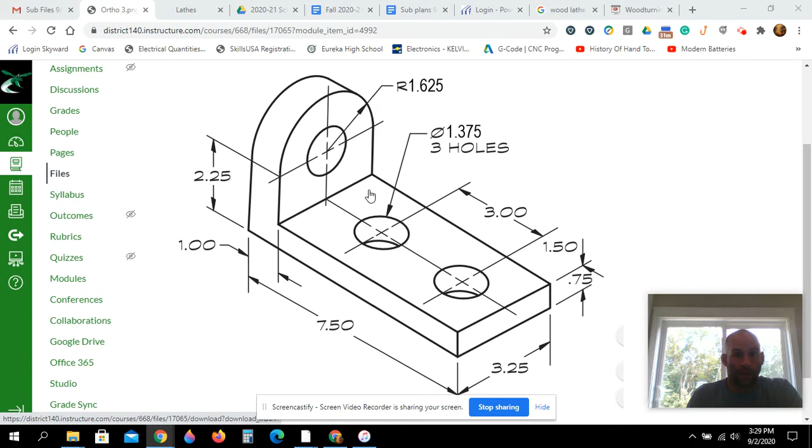So go into Canvas, right-click on your image and hit copy. Go ahead and go into your AutoCAD. Mine is older looking because, well, it's the 2011 version.

It's kind of old. Here we can see the bottom line. On our drawing it's 7.5 inches long, so we're going to draw a line nice and flat at 7.5. We can see that's much smaller than our picture, so I'm going to take my picture, click on it.

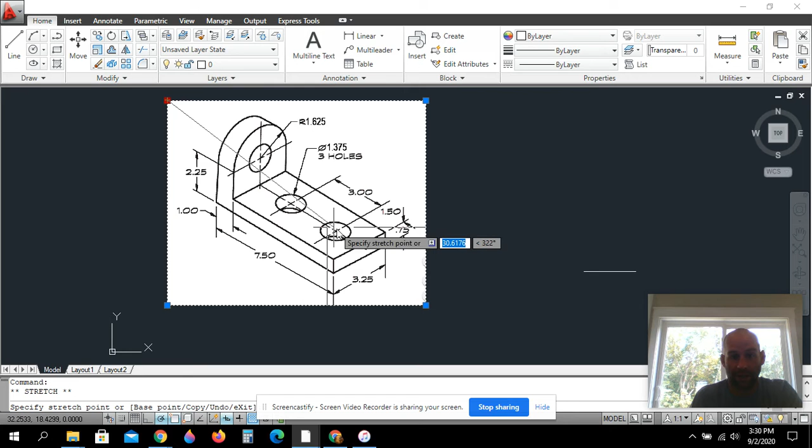I'm going to click one of the corners and drag down, make it nice and tiny. I'll hit the move button. I can use a shortcut of just enter, and click on it and move it. So this line here will be that line there.

So we're going to draw the front view and then the top and the right side. If I start here and go up, I'm going to see this, right? And then I see this also, and it's kind of weird because it's nice and cylindrical up top here, but it's flat here. Don't get confused though—this 2.25 is a dimension line, not an actual line. So you wouldn't actually see a line right there.

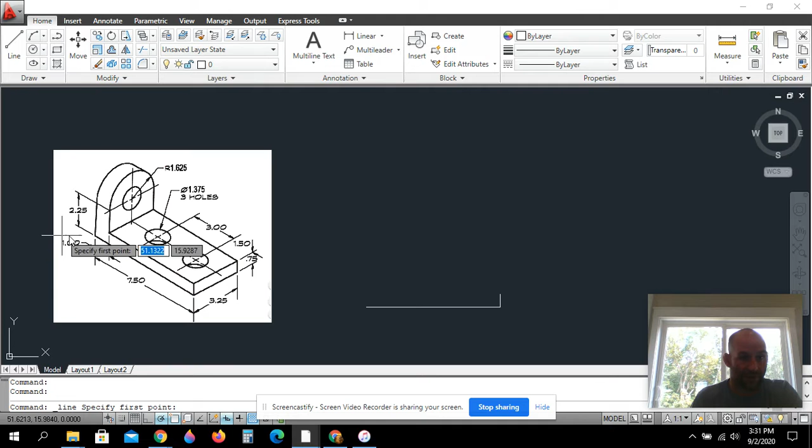So I know I have to go up 0.75—this is 0.75 right here, and those are the same height. I know I can go over. Originally the bottom is 7.5, and then we see that this is 1, so if we do a little math, that's 6.5, not 65. If you hit something wrong like that, just hit Control-Z.

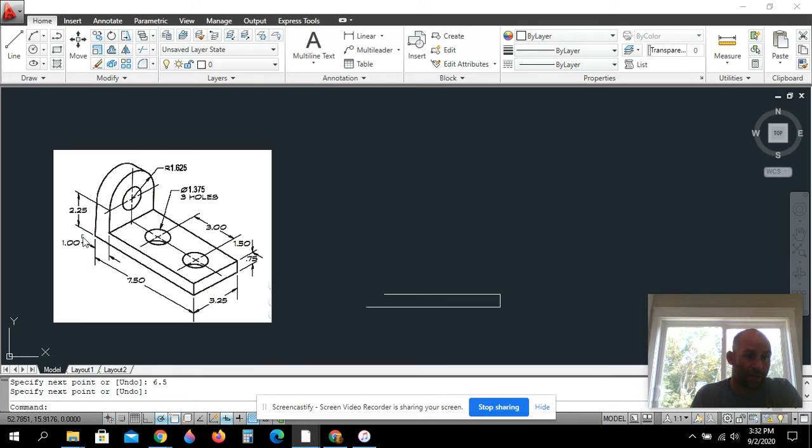And then I can draw 6.5. From here we have to do a little bit of math to get to the center mark. If we look carefully here, we see there's a center mark, which is also another type of dimension line. So to the center of the circles, both of them have the same center. We have 2.25 to the center, and then the radius of this outside circle, we can see the dimension line going with an arrow pointing from the center, is 1.625.

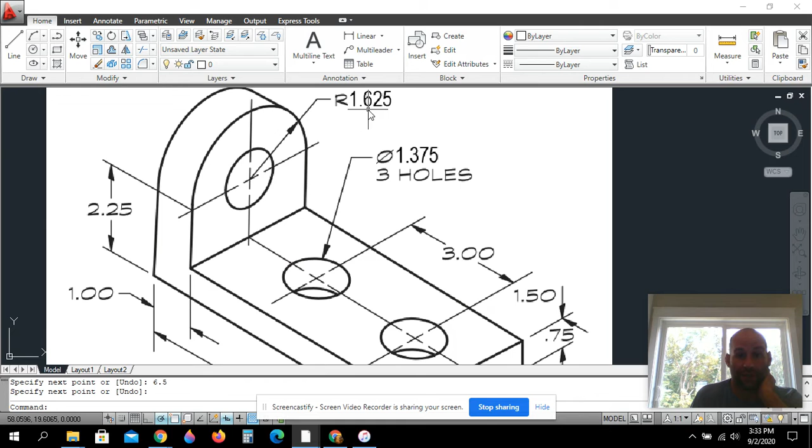Now that's just a decimal version for 1 5/8. This one must have been drawn in inches using fractions. This is 2 1/4. 2 1/4 plus 1 5/8 is 3 7/8, right? Yeah, I think so. Yeah, that's right. So I could come down from over here. You could also type it into your little calculator if you want and see if it works on this older version.

It does. It's not very big for some reason, but I go 2.25 plus 1.625, should be 3.7 or 3.875. Yeah. So there's my number—I know that this line here, that's how long that'll be.

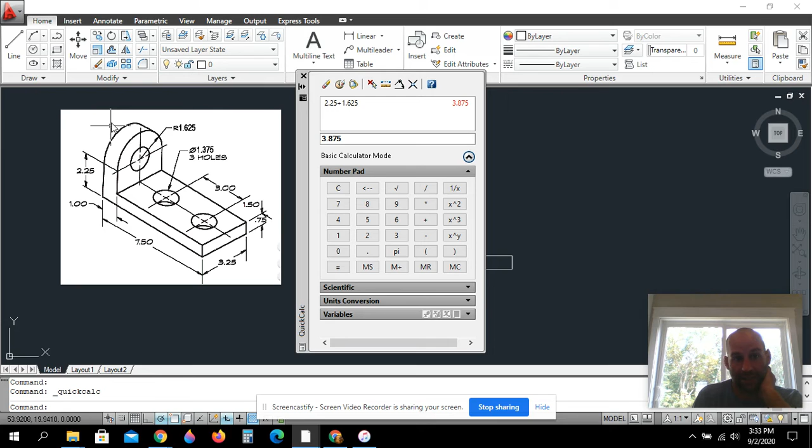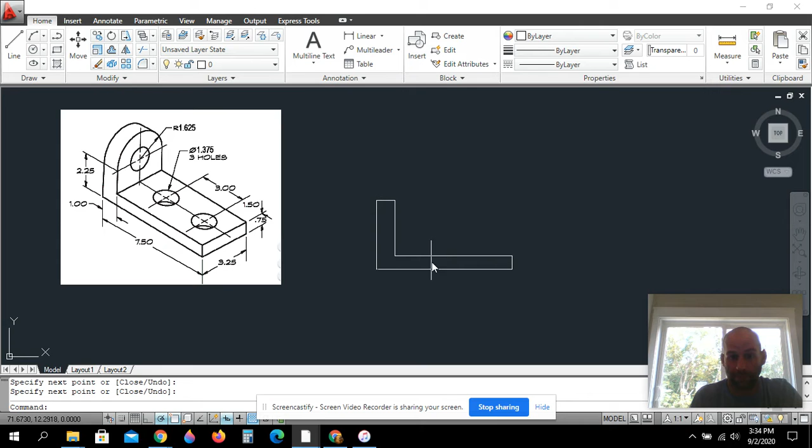So I'll come here, 3.875. And I know that this measurement is 1, and I know that connects. Now that is all of your front side, all the visible lines. We'll have more hidden lines, okay? And we could draw center lines—I'm going to have you do that, which I will at the very end, so I want to be in person when I talk to you about those.

So now we can draw the top side. We can just extend up. We'll say 2. I just hovered when I did that—I was in the line command. I came over and hovered on that corner and just pulled up slowly. You can see it says extension, and I'm going to hit 2, enter, and that's where I'm starting my line.

I should be able to pull up slowly here. Mine's a little jumpy because it's an older version, like I said. Here we're taking that piece and flipping it, so the depth of it is 3.25. I already know that that's actually 7.5. Look at that.

Okay, there's that corner right there. I'll just project it up because that's going to be directly above it, right? That's why we draw the top view like that.

Here, we can draw some circles now. All right, so here we won't see this hole because it's on the inside.

It'll be a hidden line, but we can draw these two circles. Okay, so we see our dimension lines. It's 1.5 from the center, which is what we're going to have to assume. But I believe that's right because actually you only have to assume because the circle is there, the radius circle,

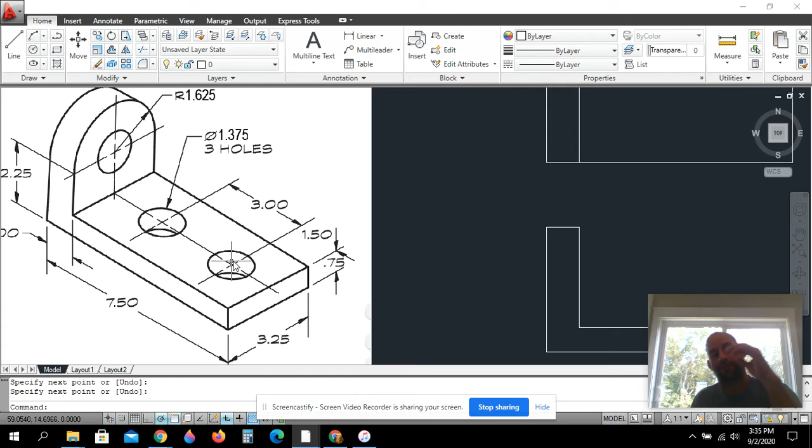that center mark hits that center mark and all the way through. So now we can draw some lines. The easiest way to do this, I see the first one is 1.5 from the far right, and I see the next one is 3. So I'm just going to draw some construction lines. I'll go 1.5, enter, and then I'm going to make sure my line's straight and hit 3, enter. I'm going to go up and draw a circle, find my endpoint, make sure it's square.

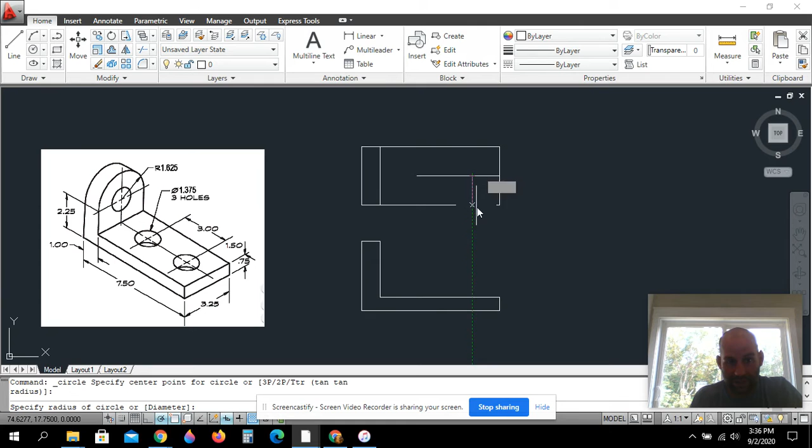I'm going to click on there, and then we have to figure out how big these holes are. All right, this hole right here, it says 3 holes. All right, so there's 1, 2, 3. They look the same, that means they are the same.

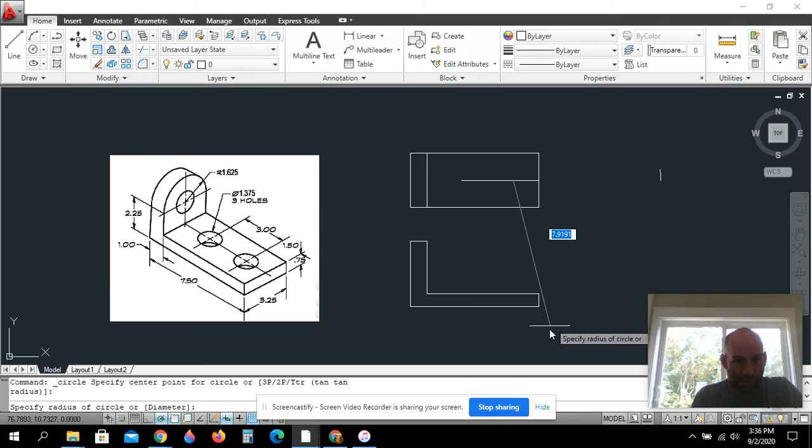1.375 — that symbol right there means diameter. All right, so hide that so we can see.

Right here, I'm going to click on here and hit D because right now it's saying specify radius. Easy way to do this, hit D for diameter. Now it says specify diameter, so I'm going to hit 1.375, enter, and there we go.

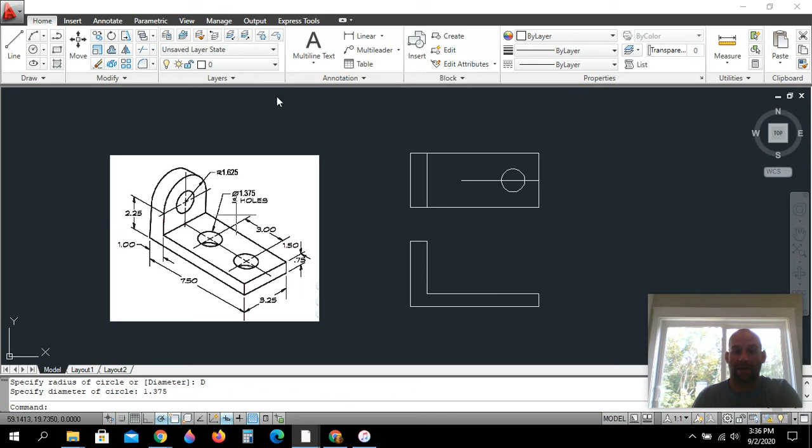Now I could draw another circle, or I can click on it and hit copy. I'll click the midpoint of that circle and move it to the endpoint there. And that is where those circles go.

Okay, now let's draw the right side. We can draw our right side by projecting or simply by using a miter line.

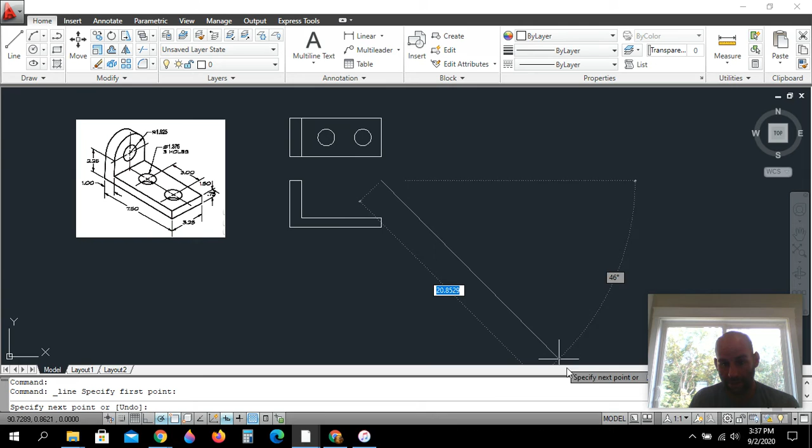I have my polar turned on to 45 degrees. If I set it to 45, I can just draw a line. I can draw some construction lines over to where they meet.

Draw them straight down. And it's essentially the same as projecting straight up, but we need to cut a miter so that we can actually know where we're at.

That actually won't be a line, but won't hurt to have it. I'm just going to draw extra lines and trim it out here in just a second anyways. So those are all the lines I know for sure right now, almost all of them.

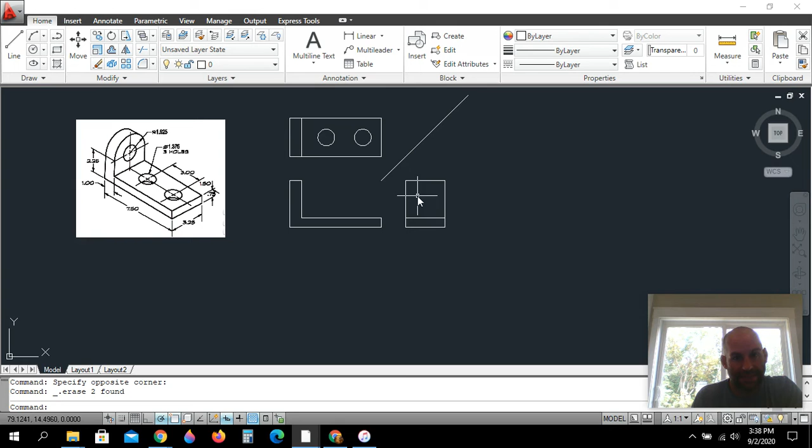I can project the center or I can project the outside parts of our circle. Either would work. That's basically the shape, except for it's not going to be square like that, right?

So what I can do here is a bunch of different ways. We need to find the center of our circles. All right, we know the radius right here, so I'm just going to go from the midpoint here, go down

1.625. I think it's easiest just to draw a circle and draw up. All right.

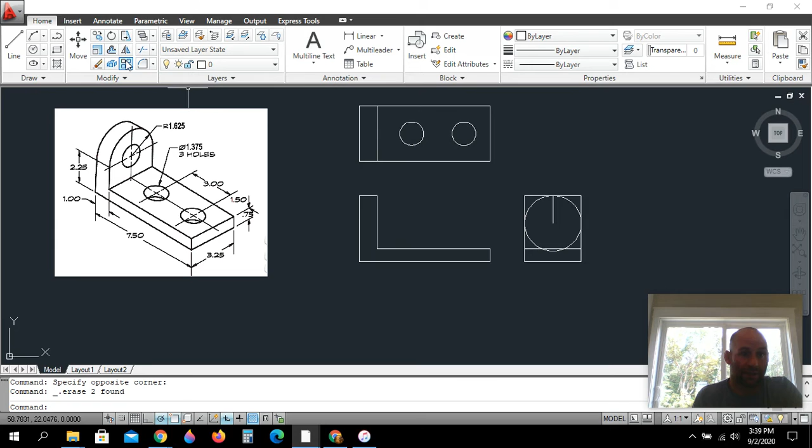Delete the rest of my stuff I don't need. I'm gonna hit trim, zoom in so I can see what I'm doing. Trim out what I don't want anymore. And delete any extra lines I have.

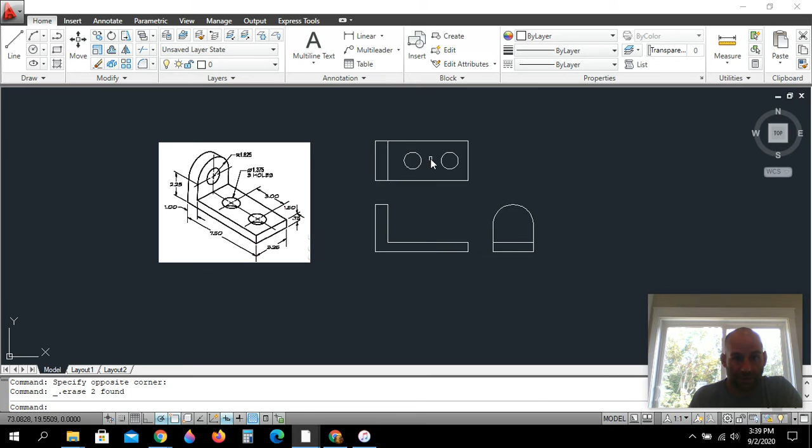Now we can see that, hey, that looks kind of right. I think that would be right. Missing one thing would be my circle, and I could draw it again or I can copy it. I think copying is just a little bit easier. And there we go — there's all of our visible lines.

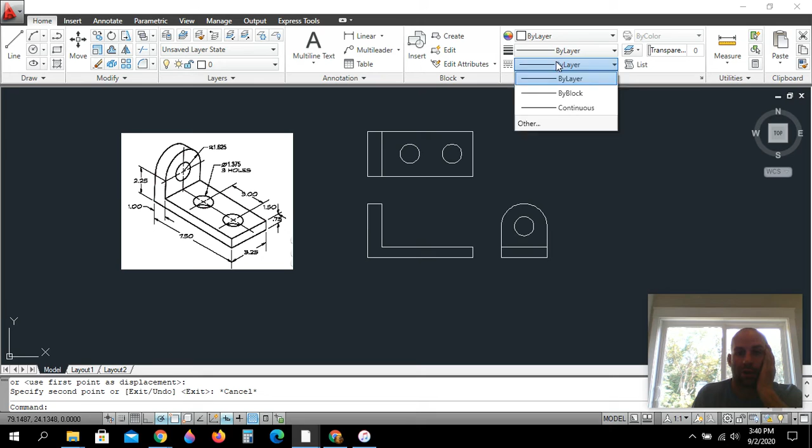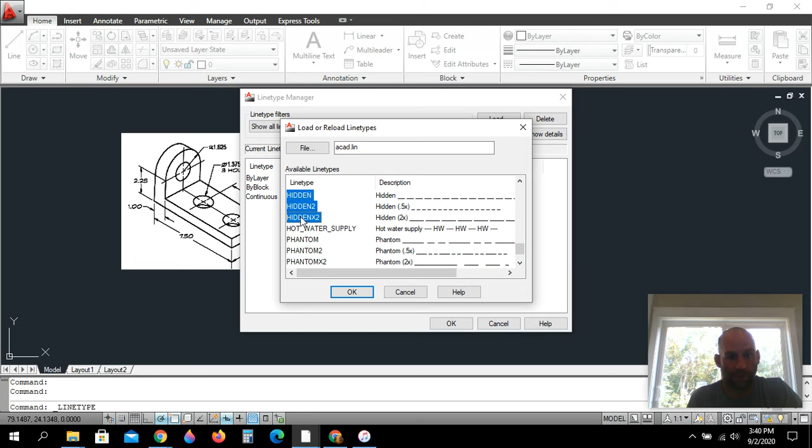Now, we do need hidden lines. We got to pretend that we have X-ray vision. So if we saw that, we'd be able to see the outside of our circles. When we look through it, we could actually see lines there, right? So we're going to load some lines because I don't have them loaded. It's still similar to yours. You see a bunch of ByLayers here, and object color, line weight, and line type. So I'm going to go down to other on that, line type, and go to load. I'm going to go to hidden, and I'm going to select all three, hit OK. I see them, they look great.

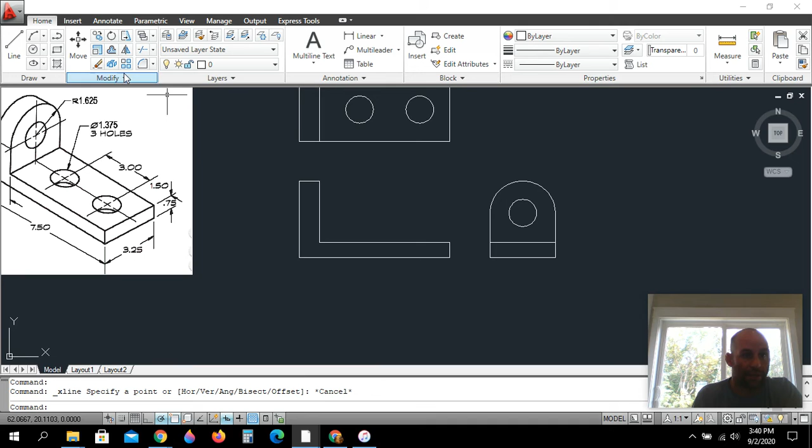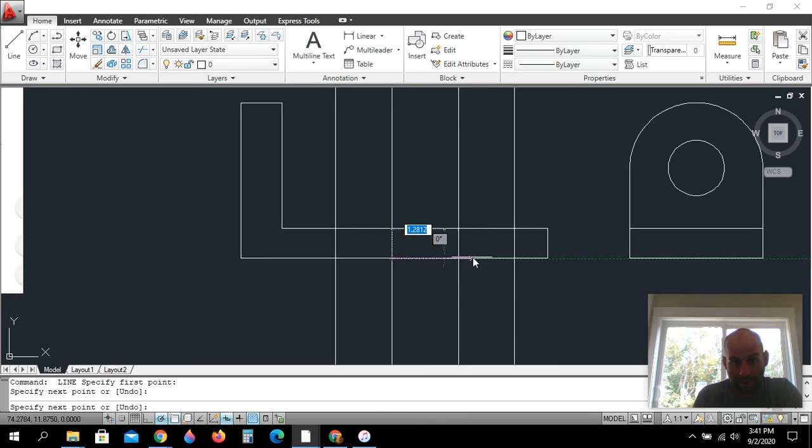And where am I going to see these? Well, all these holes are right in the middle. All right, I can project down if I want. I could actually draw a construction line if I wanted to. Here's one for you. If I turn quadrant on, my object snap, I can draw and project down like that if I want. It just goes on and on forever. It's a line that never ends. And then I could go to line, and that's where those hidden lines would be. And I could just click here and here, here and here. Zoom in if you have to, so you can see what you're doing.

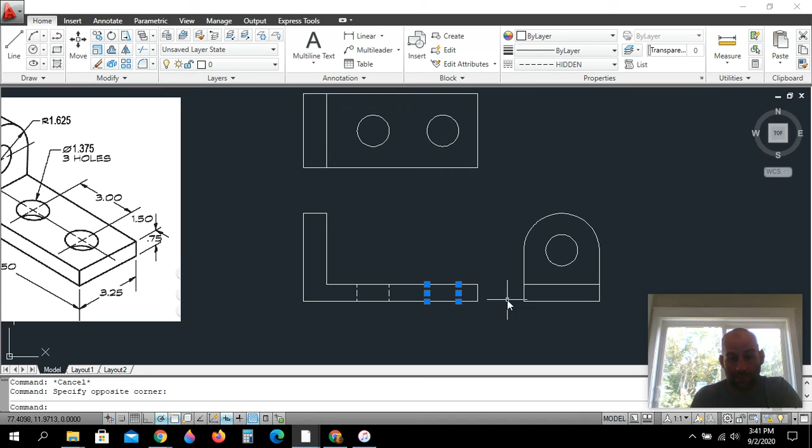Boom. And wait, those don't look like hidden lines, do they? Well, just select them. Come up to our ByLayer, our line type, and hit hidden. All right. And if I wanted to, I'm going to be real sneaky, and I'm going to copy again. Copy. I'm going to select this top corner here.

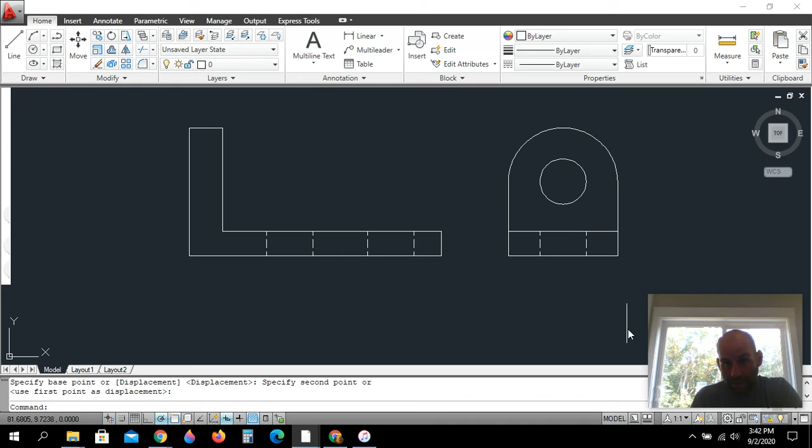I'm going to hover over this quadrant, and I'm going to go straight down. If it lets me, it might not, because I do have the old version. Well, maybe I'll just click there. Grab these two lines, hit move, and get them in there. I could have just projected straight down from that circle. It would have been easy too. All right, I have

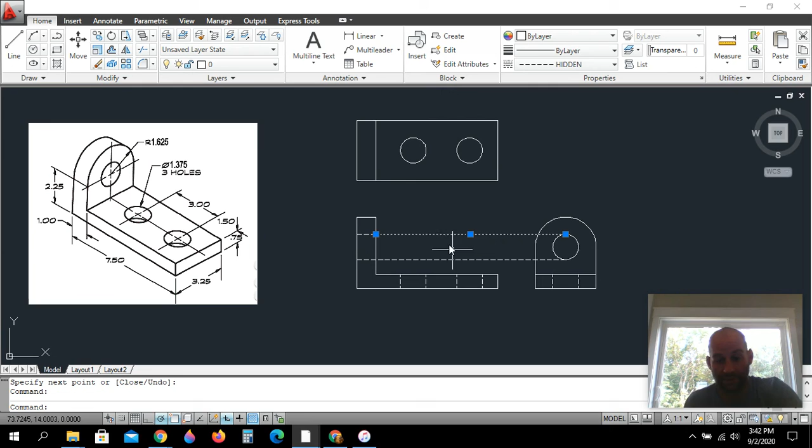A couple more to do real quick. This time I'm just going to change to hidden line right away, and I can project over. And I already clicked, so I'm just going to click all the way over. I can just hover for a moment and slide. If it lets me, it might not. And it's not letting me, so I'll just draw it. I could just click there and click there, and then I could just delete that line. And this one, it's one solid line, so I have to trim it. All right, it won't let me delete a line, so I'll delete that. And there's that. Same thing.

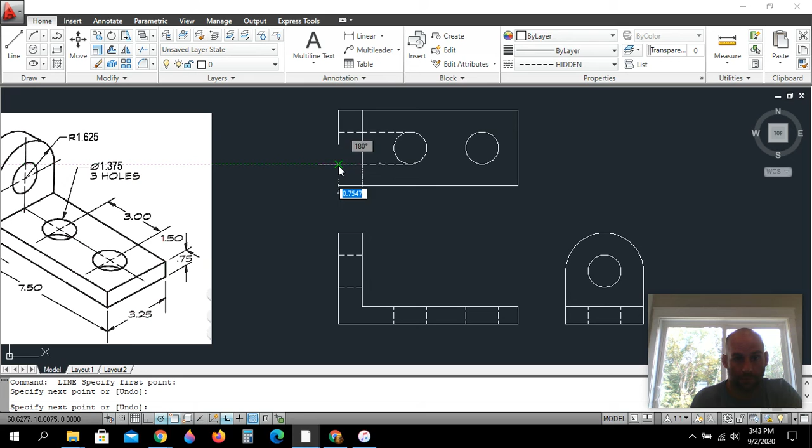It's going to be just as easy to draw a line right here, like so, and that is all that I want you to do right now on our Ortho 3.

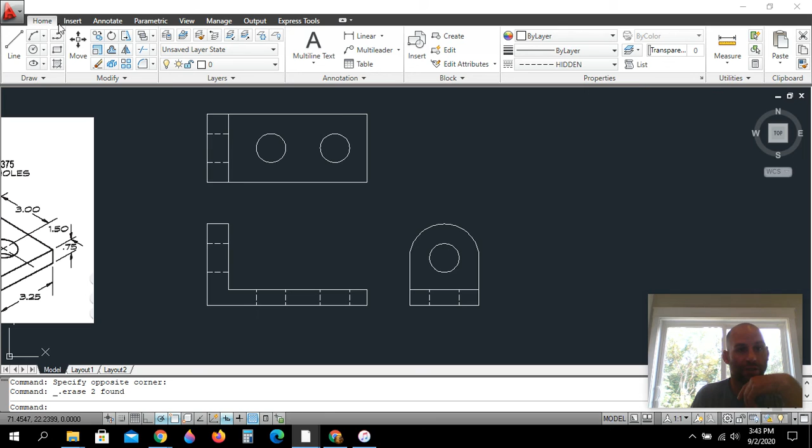There will be center lines, but I'm not sure if this version doesn't have the nice, easy way for you to do that. So I will not talk about it because there's a very easy way to do it. Otherwise, we'll have to come up here and load a line, which would be a center line. There's a whole bunch of them. Hit OK. Find the center point here.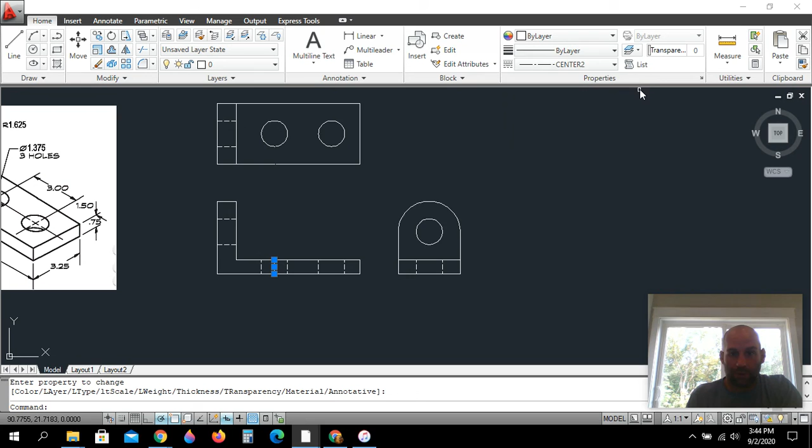Like so. Still drawing in hidden lines. My wife's walking through while I record, so you might hear her. I'm going to say hi.

And then we would have to extend these at the same amount. It's kind of a pain. And make sure it's centered. Well, that one didn't work because it's not small enough, but that's what it would look like right there. There's an easier way to do it in the newer version, so we don't have to worry about that. I will show you how to do that, but we would have one there right in the center.

We'd also have center marks, which would be in the center of our circles that you can see, which I don't believe are on this version either. It's kind of the lazy, easy way to do it. But I will show you that when I get back.